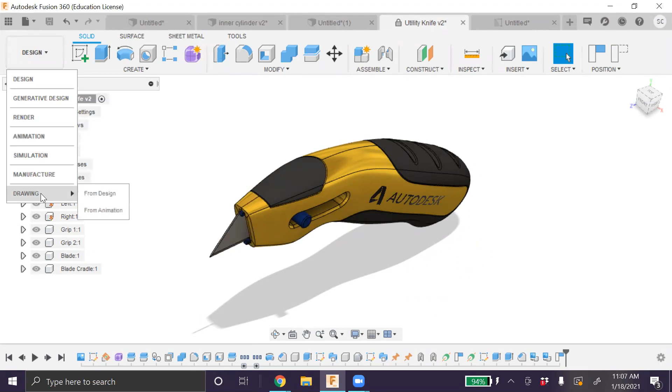I'm going to use this utility knife to create a drawing of it. Since we have a nice assembly already ready with Fusion 360, you will be using this drawing sheet feature to make projected views on your drawing sheet from the product you made. So the first thing you do is go to the workspace, change it from design to drawing, and create a drawing from this design. Choose what you want to show: just the visible assembly, or the full assembly.

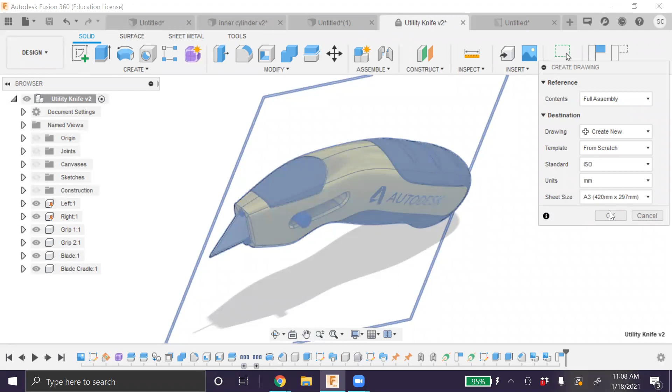Go to create new. You could either have your own template if you already have it stored in the cloud, or you could start from scratch. If you go with ASME, the sheet size will vary; if you go with ISO, there will be different sheet sizes. I'm going to take ISO and use A3 sheets. The industry commonly uses A3 sheets as an equivalent. You might have to find an equivalent for that in ASME, and click OK.

Now here we see that a piece has come with us from the previous design, and when you zoom in, you see that is nothing but your knife. You would see over here you have the base view, projected view, section views, detailed views. Now, what exactly are these views?

If you go back to your utility knife and click on, say, the home view, you see this has an original way to look at it. There's a home view to look at it. If I click on the right, I can see what the right hand side looks like. Go ahead and click the top - I see that there are just certain parts in the top that are visible. And then there is the side.

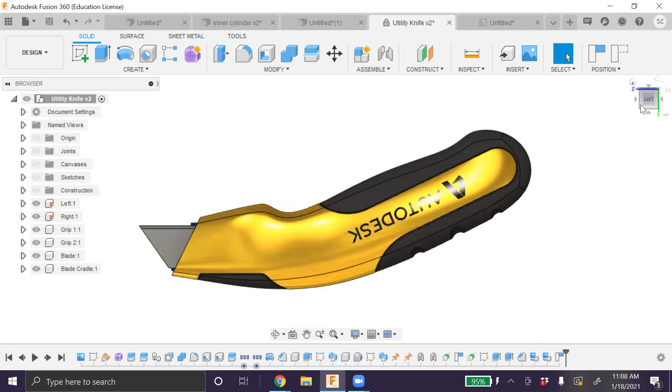But you do realize that in spite of having 6 different sides - three sides, top, left or right, and bottom - three sides are more than enough to uniquely and completely describe the details of the knife.

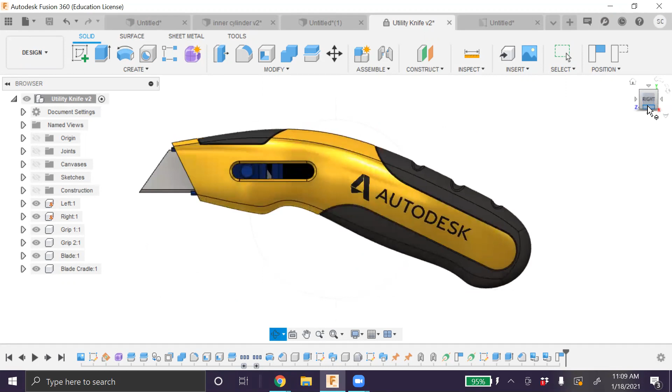I'll probably choose the right plane. I'll go with the top plane for the general nature of the curve. And the front plane - in this case, the front plane is not very meaningful, so probably I'll take the bottom plane instead.

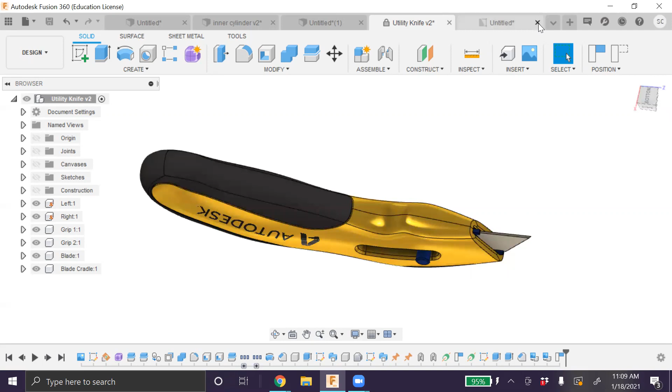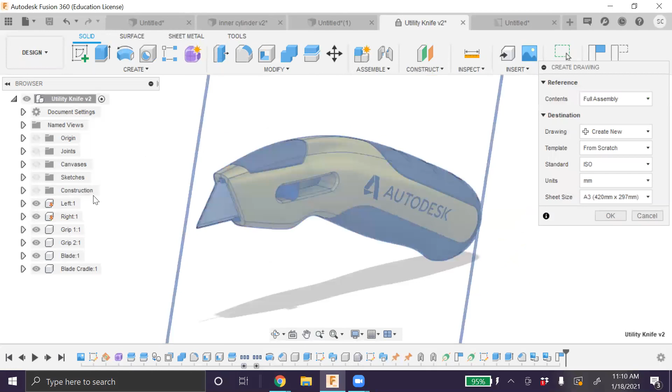So this is exactly what will happen in your drawing as well. So go ahead, let's do it again. I'm gonna go ahead and design, drawing, from design - home it first, always home it - drawing, from design, go slow.

So here is your drawing. See, I'm gonna need the base view. This is my base view. Once my base view is done, I'll take the projected view.

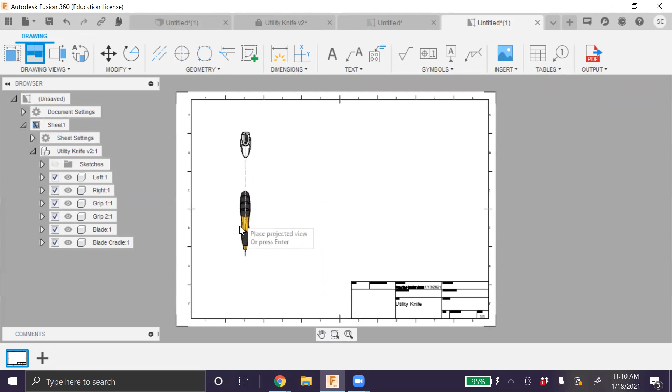Now, this was my top view. This, as per this, is the front view. When I take it here, you can see this is the side view. And if I want to show a more isometric view, I can angle it in different ways, and you see that the shape changes.

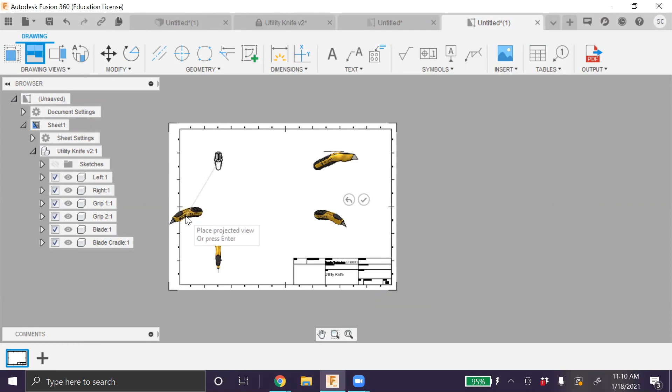So the usual nomenclature is you have the side view and the top view at the top. So you have either the front, top, and side, or the top, front, and side, depending on the kind of projections you use. But for now, you just have to give three distinct views - that's all that matters. And if you want, additionally, an isometric view.

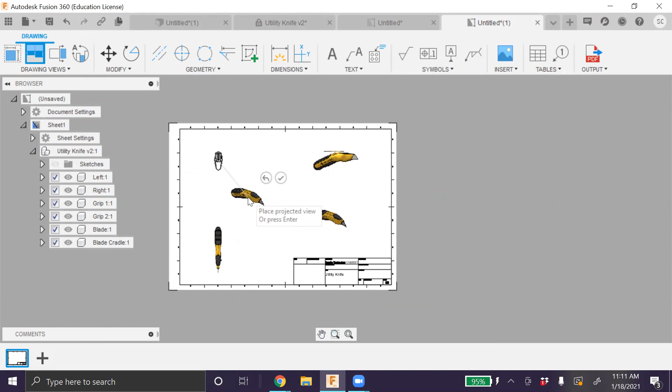If you want to go ahead and show some details in your drawing, just remove this. If you want to go ahead and show some details in your drawing, or you might want to increase the size of it, you could do that from here.

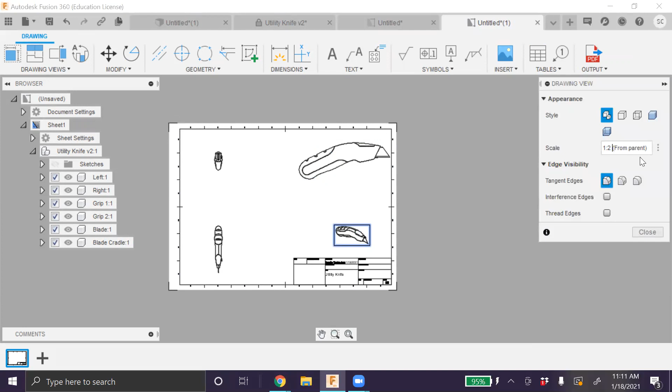So they are equally big. I'm going to make them true to scale, if you want, 1 is to 2 is half, 50%. I'm going to make them to their true scale. You could just click on individually of these and rescale them. It's a bit bigger than we want it to be.

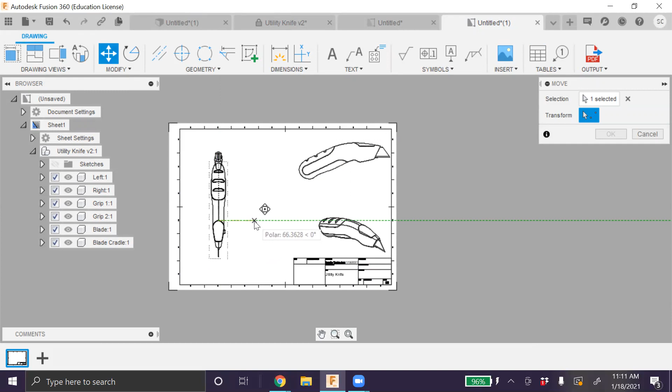You could hold it in a place and move the object. If you're changing the scale for every object, you might have to mention that. So I'm not moving this or changing this because I took the true scale and also because there's not enough space, but preferably keep all four of these in the same scale.

If they're 1 is to 1, keep them 1 is to 1. If they're 1 is to 2, keep them 1 is to 2. Do not change the dimensions.

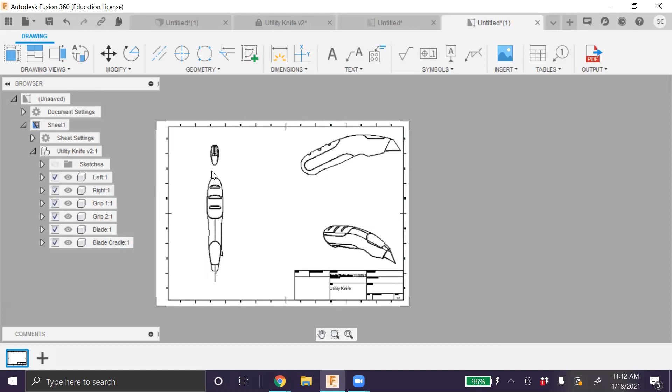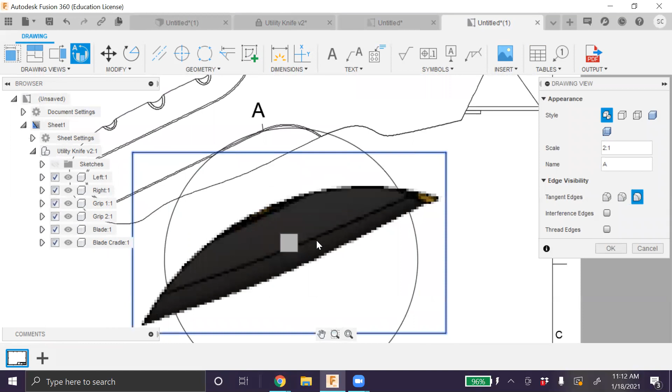The next thing would be, if you want to show these notches really detailed, you can click on something called detailed view. Click on a component and kind of draw it out, and here you will see what that component exactly looks like. So it removed this notch completely and showed how it looks. Let me see if I can change the style for it. Yeah.

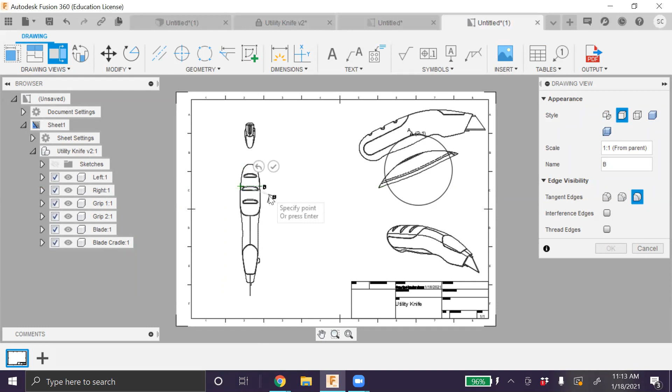Alternatively, if you want to see how it looks in a sectional view, I want to choose a parent view and see what kind of section you want to take. Suppose I want to take a section from there to here to here. That is the cutting line, the section, that's where the section is going to be cut, as you can see. Take the section, cut the line, and you will see a section view.

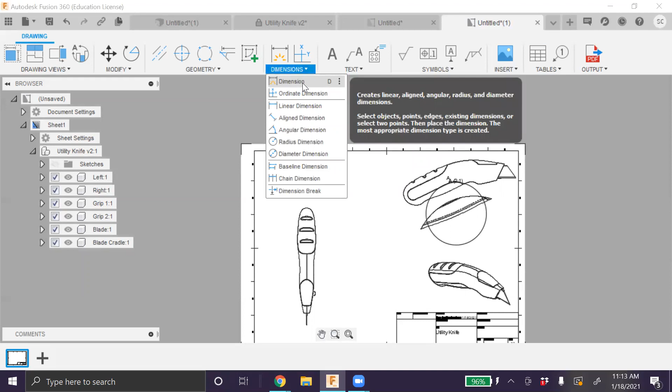The next thing you might want to do is add dimensions. You can give different types of dimension: angular, straight, ordinate. Again, the command for that is D as well. Suppose just click between the 2 points where you want to give the dimensions. Do not give redundant dimensions.

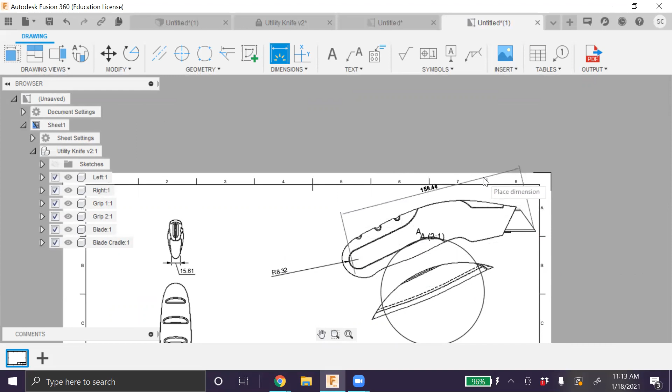This is for more curvy, more curvature objects. Be sure to give the radii. Be sure to give the end to end distances in the object and stuff like that. The second part of this, you can also create a sketch within this, add your own geometry, make changes to the model in the drawing, although it is strongly not recommended that you do that.

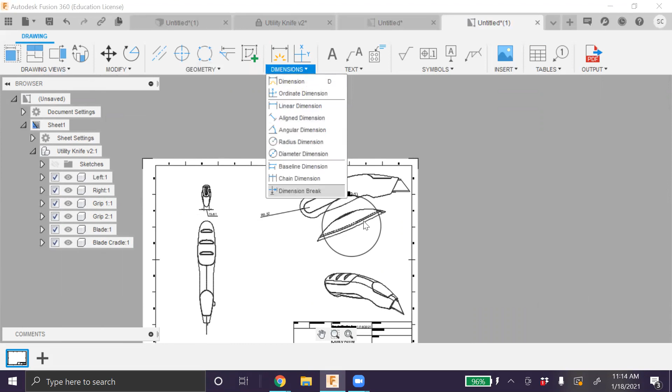The second, more important part of this was the bill of materials. To create a bill of material is nothing but a list of every other part inside your model. So if it's a lamp, then I'm going to go back to the lamp example. If it's the lamp, when you assemble it and you draw the drawing sheet, it's going to be lamp shade, lamp holder, the central shaft, the lamp base, wires.

All these things have to be mentioned as a list of parts. What material was used and how many of these parts are there? Have you used any screws and bolts and fasteners to put them in place? Are there any joints that you need to know?

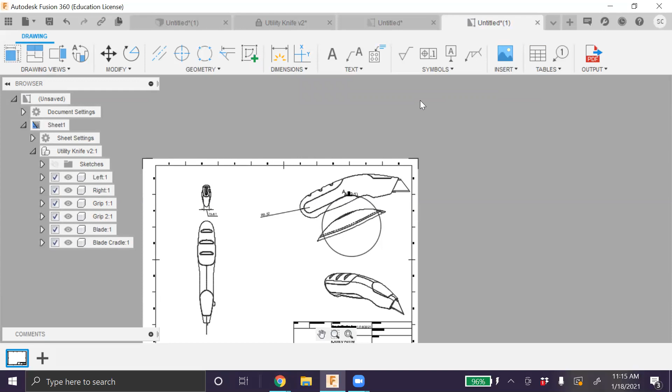Now, all these things, just go to table and, say, I don't have space, I'm just going to click it here. You'll notice as soon as I click on the table, since this part has all of these named in our model, you will see that these details come in directly.

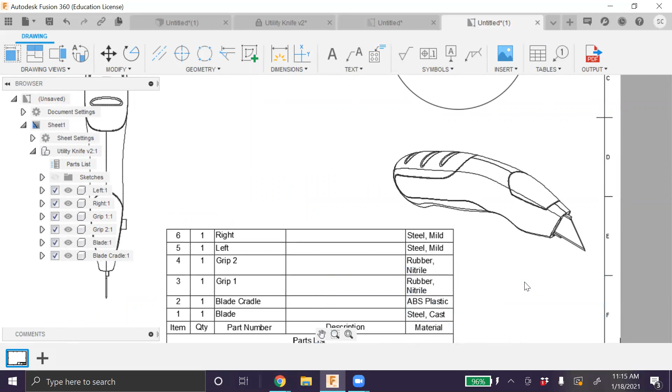If you remove that, if you want to make changes to this, now this shows the number of items, quantity, part number, etc. If there had been space here, if it blurs to the top, this would have the item and stuff would have been at the top. It would have been a normal table.

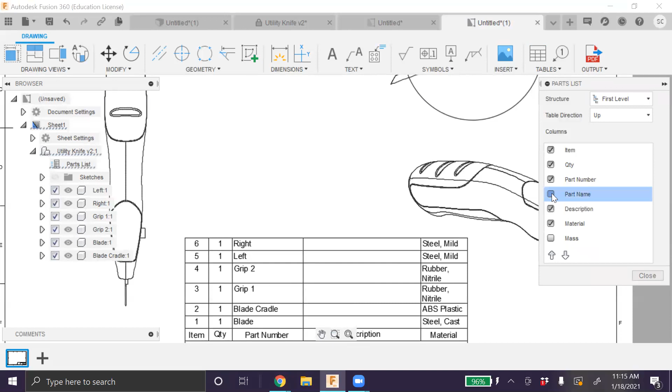Just if you want to make some changes, double click on it. You can add the part name, you can add the mass, you can go on making those changes.

Now for a part that doesn't have these details, suppose we take, okay, let us take the example of our inner cylinder and say I want to make a drawing out of this, all right?

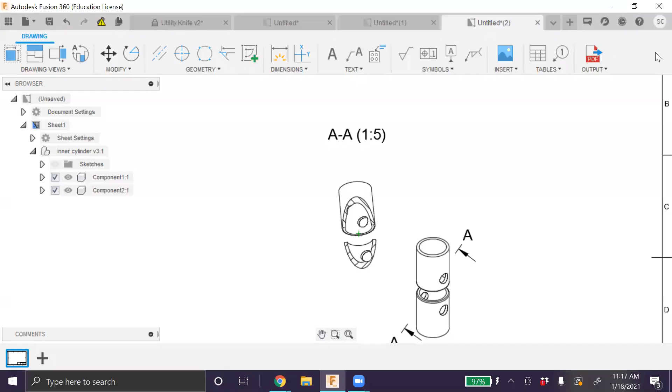So I converted that to a drawing. Now I have, say, a front view and a top view. Now there isn't a lot to do in the side view, so I took the isometric view.

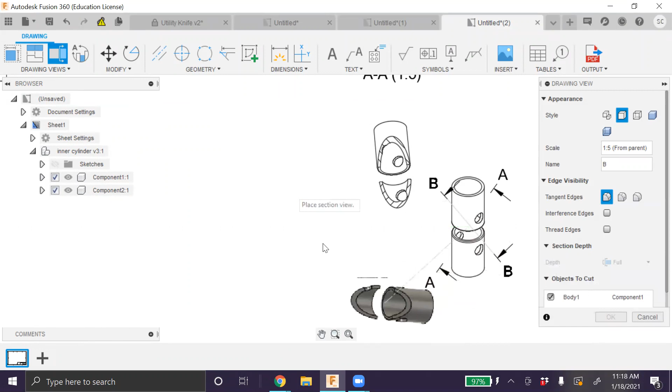And I took out a section. Section views, as I showed you previously, it's just click on the parent object, draw a line from here to here, hit enter, and there is your section. It's showing like a cross section, an oblique line cut. These lines are nothing but a section. It's about this line that's going to part and show the object to you.

Anyway, and then I go ahead and add some dimensions. The primitive dimensions are here, so I'm going to go with this.

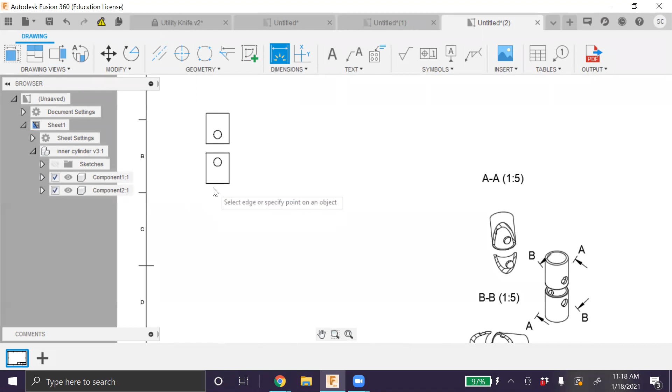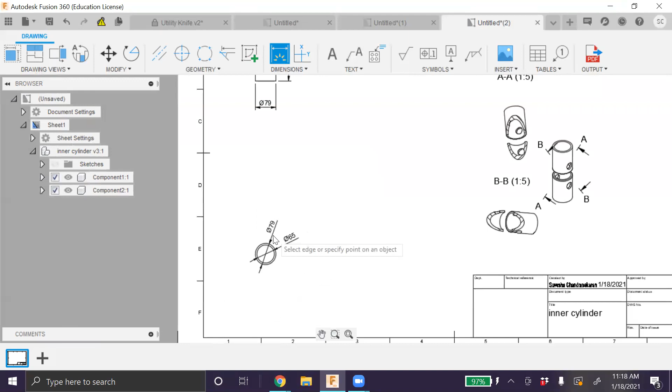It can be a bit annoying for tinier objects to dimension them, so be sure to zoom them in and kind of play a bit with the control interfaces.

Now, once they're dimensioned, I'm going to add a table again. Now, I had them named as component 1 and component 2, so there isn't much I could do over there. And the material by default was steel.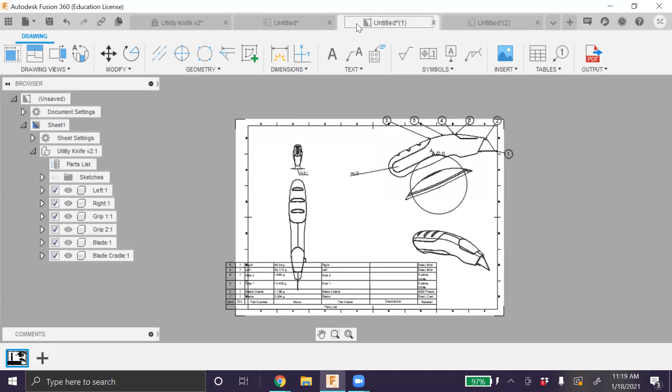If you wanted to go ahead and change these, then you go here, you change the name, click on it and say cylinder 1, all right? And you want to change the material, go to modify, physical material.

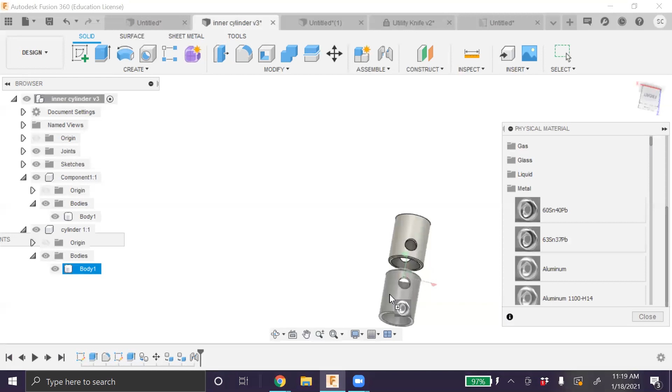And you have a library of materials to choose from. I'm going to go to metal. I'm going to go with aluminum. For this one, drag and drop, as simple as that. Now it knows the material.

And now when you come back to the drawing sheet, interesting, where is the drawing sheet? I'm going to close a little unnecessary ones, but we just have the necessary ones.

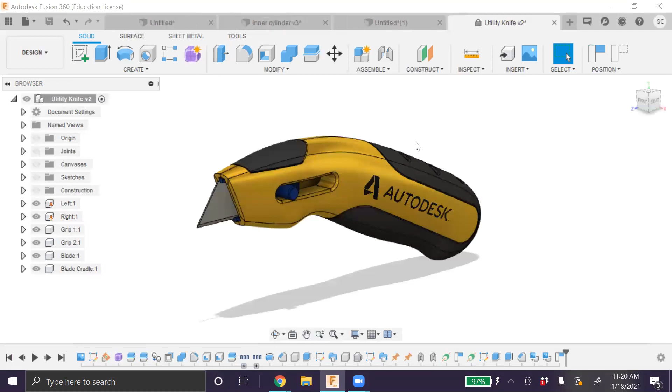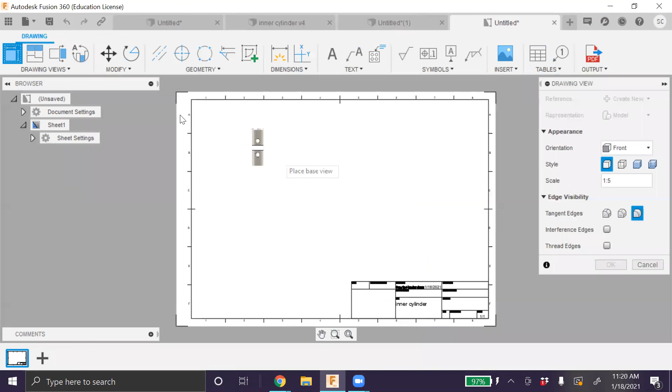So now when I create a drawing sheet, now that one has already been created, so it will not record the changes. So now when I create a drawing sheet, and I place these objects and I give them their projected views, an isometric view, side view if you want.

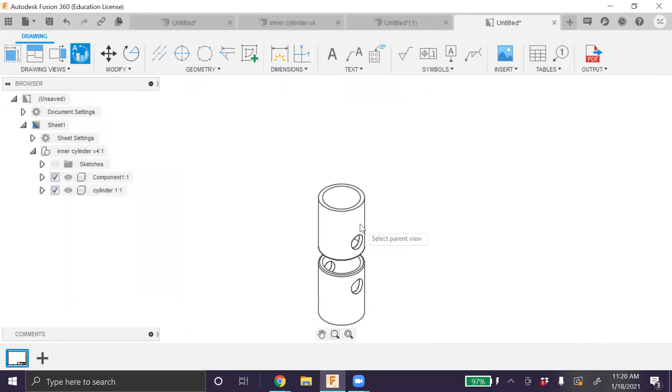And then maybe there's no details to show over here, so I'm going to give a sectional view.

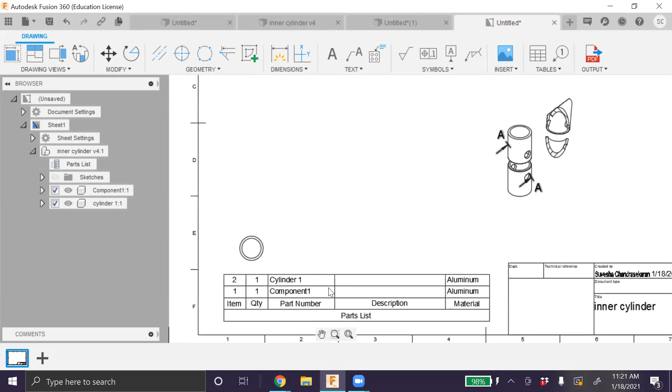Okay, and now when I go and try to insert the table, it has component 1, cylinder 1 and component 1 and aluminum. So these things changed. You can also add the mass of the object. It calculates depending on the dimensions and the material density of aluminum.

You can add a part name to it. You can remove some of these items. So this is how a bill of material is made.

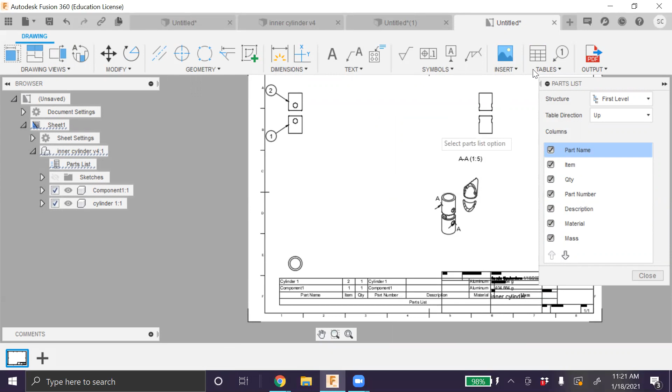Now this bill of material, you can also use something called balloons. And take a part, balloon it out, and then show the numbering of the part number over here.

In addition to this, this table has all the details of your drawing. Imagine you're in a car manufacturing company and you have so many details to talk about in your drawing - what version it is, what part are you changing, what modifications have you made.

Now, how am I going to know the difference between 11 different CAD models, all looking seemingly similar, but with mild variations or a version improvement? That's when the title, created by whom, the type of document, technical reference, all of these questions come into picture.

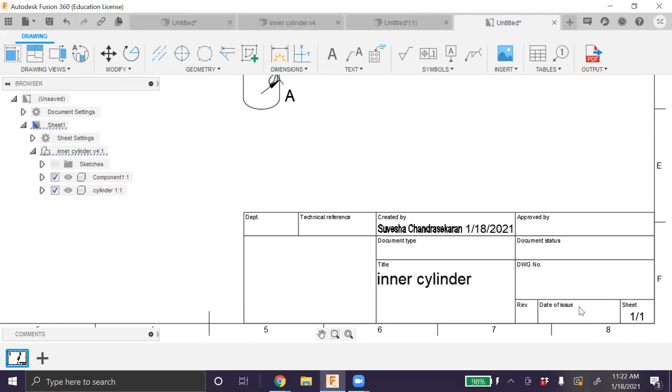Date of issue, again, very important. If I don't know on what day the drawing was created, I might as well not be able to arrange them in chronological order. Which part of the sheet is it?

Right now, we have been looking at very simple components, just like one sheet, or don't require one whole sheet. But as the complexity of the part increases, you might need multiple sheets.

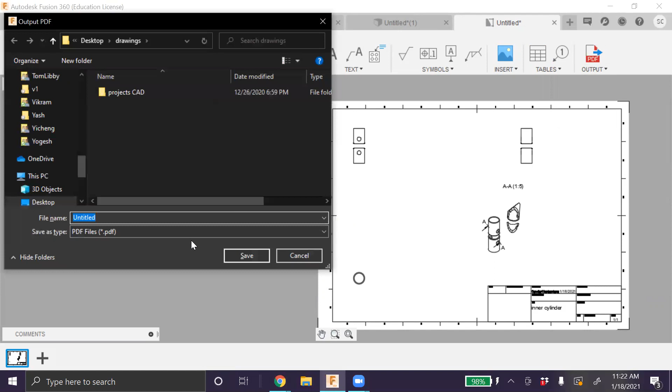Next, to get an output, click on PDF, output as PDF, current sheets or all sheets. And there you go, your PDF is saved. I'm just going to save it as test, save on my desktop. Save. So now you have your PDF file that you can share with the manufacturer.

That was all about drawing sheets. I realize it's a slightly lengthy video, but that was to show all the possibilities that a drawing sheet can do. So you could stop and fast forward as and when you want.